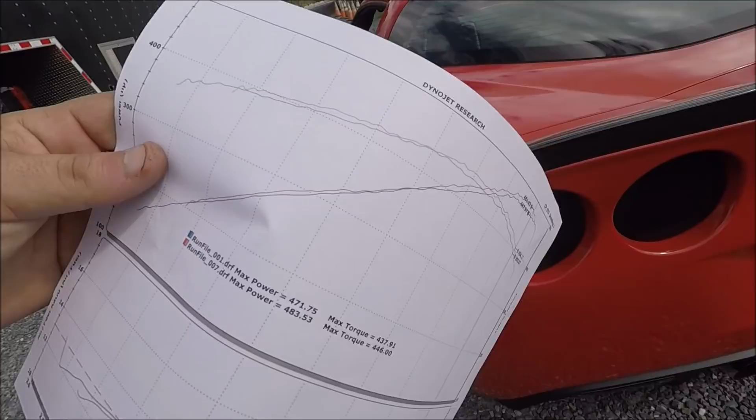We have a very nice Z06 that just got off the dyno, and it put down 483 horsepower and 446 foot-pounds of torque. The air-fuel was real rich at the top, so we leaned it out, got that straightened out, and made some good power.

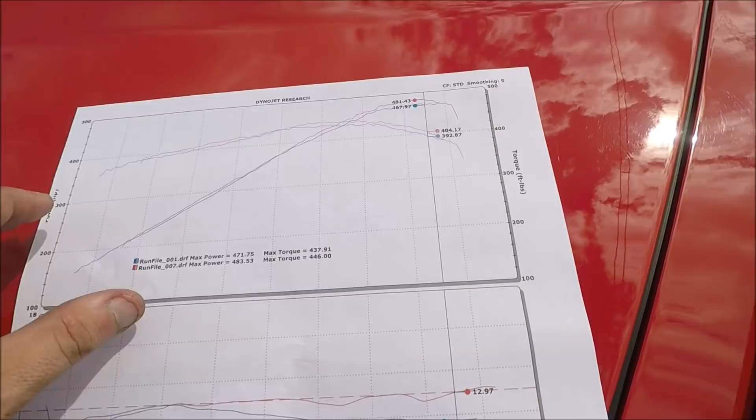That's the owner right there, guys, and it is a very beautiful car. He's going to be doing heads and cam, a supercharger, and a turbo and all kinds of stuff in the future with us. Thanks, Andy, we're going to make like 800 million horsepower. It's going to be amazing. Well, I hope so.

Thank you so much, I appreciate you coming out. It's been fun, enjoy it. If you have any issues, any check engine lights, anything like that, let me know. Certainly will. Other than that, you're good to go, boss. All right, you take care. You too, man, thanks, see ya.

So now he's leaving, and the next car on the dyno is going to be the main event here. We also have a pro-charged C5 we're doing today. We're not doing anything to the slow Mustang, we don't want to get run over, right Keith? Whatever you say, I know right?

We have the ZL1 here, and Keith's going to get this thing on the dyno and we're going to do some passes, see what goes on. I'm hoping to see 900 horse out of this thing on a stock LSA. What do you think, no? Doubtful? I think it might do it. It'd be pretty cool if this car does it.

So we're gonna do a gas tune first and see what it does on fuel. Then we're gonna drain the gas out, put E85 in it, and retune for E85 because it does have a flex fuel sensor.

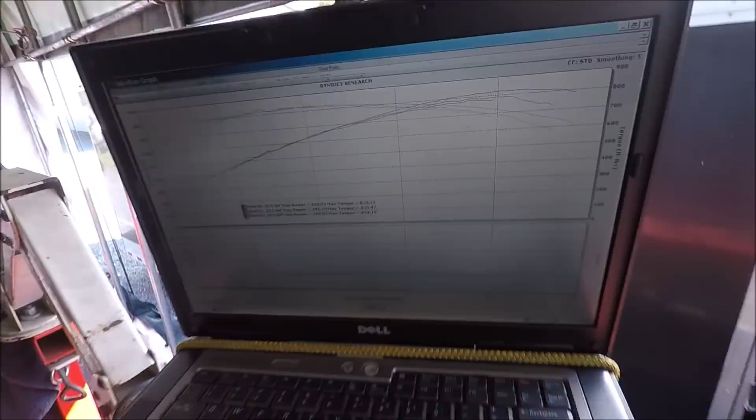It did 839, 791 horse, which ain't bad. It did not do the 822, 825, guys, just so you know, that was from the previous run we did without all the stuff in it.

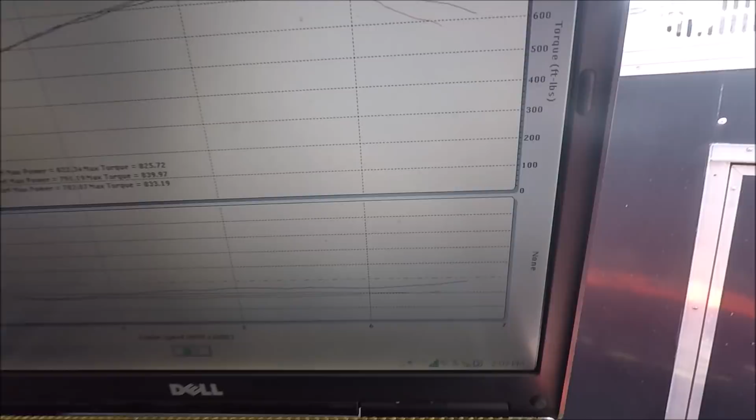Air fuel still looking kind of good. We might actually do one more pass and add a little bit more fuel to it, just to keep it on the safe side when it comes to fuel. And then the E85, we'll be putting that in and doing that as well. So that should be pretty wicked, guys, we're hoping for some good numbers.

Let's do Tommy T's car now.

That's just one, 79 degrees. Let's see if we can get it down lower. That is on too, so.

75 degrees, 72 degrees, oh yeah, 70 degrees. Here we go, the temperature's at 138, so 66 degrees. Probably let it get up to like 150, 160 temp. 64 degrees, that's what I like to see. I don't like this song. 63.

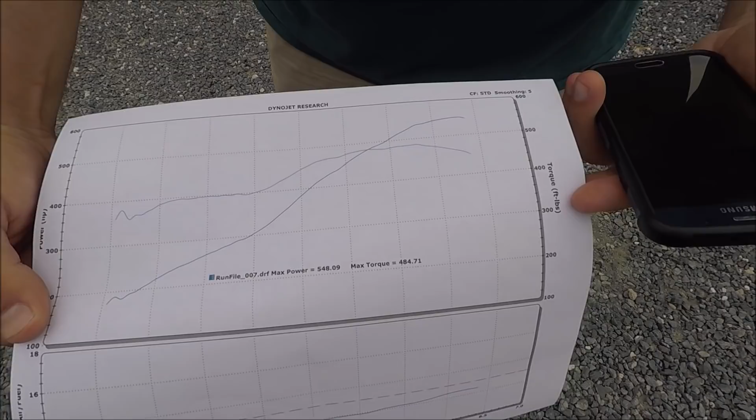Let's see what this dyno sheet looks like. This is just dyno world today. Look at that, that's crazy, dude. I mean, you're really not doing anything until later on. You can tell where it starts going. But that's pretty wicked, that's pretty wicked.

So we discovered why it's making 3 pounds of boost - it's because it has an aftermarket underdrive pulley on, which is tiny as shit, so it's not spinning the blower as fast as it needs to be spinning the blower. It should be making 9 to 10 pounds, and I think this car making 9, 10 pounds, you're easily gonna see over 600 horse, no problem.

Easily see. So what did it make before with just heads and cam? 434. And whose dyno was that on? Was that on a dyno? It was on a Dynojet. It was a Dynojet dyno, so it's pretty much kind of the same dyno, and so you picked up over 100 horsepower on 3 pounds of boost, basically.

And methanol - there is an AEM methanol kit on the car. It was spraying, so you gained basically 120 to 130 horsepower with methanol and 3 pounds of boost. What are you gonna do? I don't know what I'm gonna do, but it's pretty funny, guys. It is pretty funny. So we're done talking about it now. We're gonna get the right pulley, and we're gonna make 9 pounds of boost and 600 horse plus. Yep, so it's gonna be pretty awesome.

All right, guys, there you have it. You've seen all 3 cars dyno tuned on Keith's Pit Stop Dyno. I want to give him a big shout out - the man is amazing, the dyno's amazing, we had such a fun time. That ZL1 put down some amazing torque numbers, and the white Corvette C5, for just being 3 pounds of boost, did a really awesome job too. He plans on getting another pulley later on, an actual stock lower pulley that should be making 8 to 9 pounds of boost, and at that point in time we will definitely see some serious numbers out of that thing, probably around 600, maybe a little bit more, which would be pretty cool.